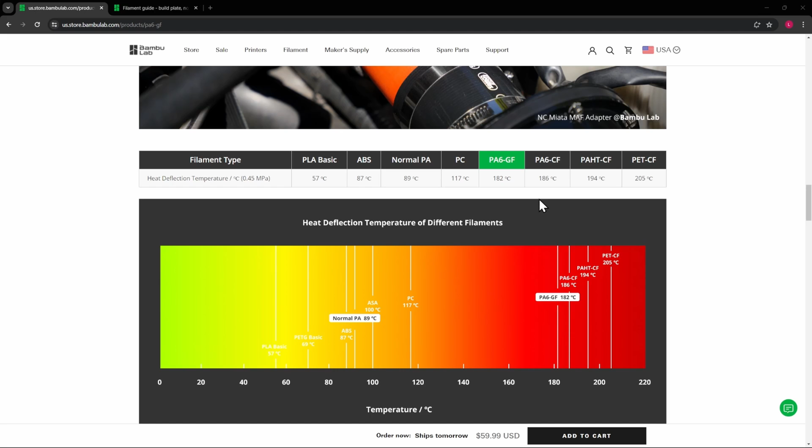So we'll see where it stacks up with the thermal properties, right? And it's not the best in the world like PETCF, but it is right there in the middle, better than PC, and right around in the same range as the PA6 carbon fiber that we've reviewed in the past. The funnel is probably one of the prints that you should make if you do get a roll of this, because of the chemical resistance.

And I mentioned that in the beginning. Out in your shop, if you need to add fluid to your car or something like that, there'd be different chemicals and everything like that. So it'd be important to have something that could withstand some chemicals. So, it offers excellent resistance to chemicals, oils, and many kinds of solvents, right? So if you're doing any of that type of stuff out in your garage, or you're messing with chemicals, it'd be good to print a funnel with that, and we'll do that today.

So what's really cool is they have lots of different colors and everything, right? So if there was a chemical spill or something, you can make a sign out of this stuff. It's really cool that they started to add the hex code to all of their colors. That's really, really cool. And again, here's how it stacks up with PA6 carbon fiber and PAHT carbon fiber, both of which we reviewed on here.

AMS compatibility, it does say yes on here. This used to say yes as well, but it doesn't anymore. Dry out before use. One of the other benefits of this is it is showing a higher print speed than the rest of these. So, it may print a little bit faster. It does require an enclosed printer. So that's where the AMS Lite, I'm not sure which enclosed printer you're going to do with that, unless you print out and make one of the enclosures for the A1 or the A1 Mini, which I don't have. So we won't be trying this out on the A1 Mini this time.

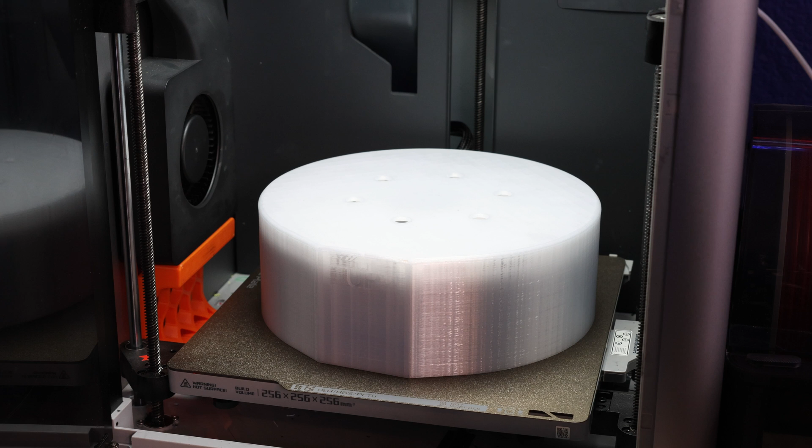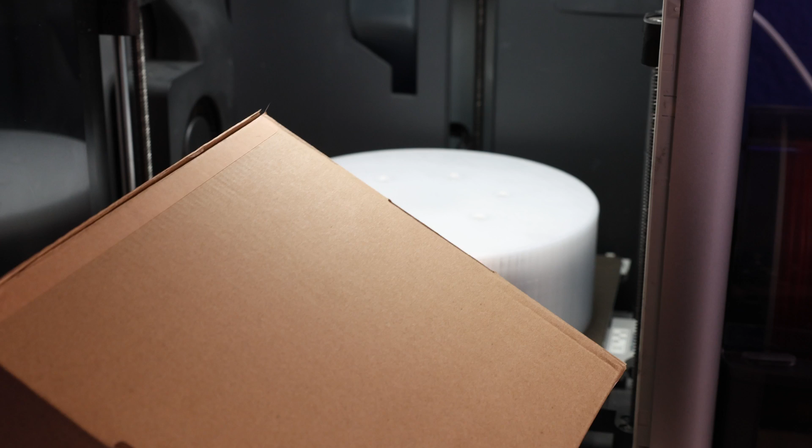So let's go ahead and get it out of the printer and load it into the AMS, and then we'll make our first print. All right, so here we are in the printer after it is dried. You'll see that I do have a spool cover for it that is needed for this. Otherwise, if you haven't printed one of these out, you can just use the bottom of the box. Just cut the lid off and put the bottom of the box over the spool to cover it.

This glass fiber filament might be a really good filament to print one of these covers out of as well. So if you do have a roll of this and are looking for something, one of these covers would be a good thing to print out of it, since it does have high thermal resistance. So let's go ahead and get it out of here and get it loaded into the AMS.

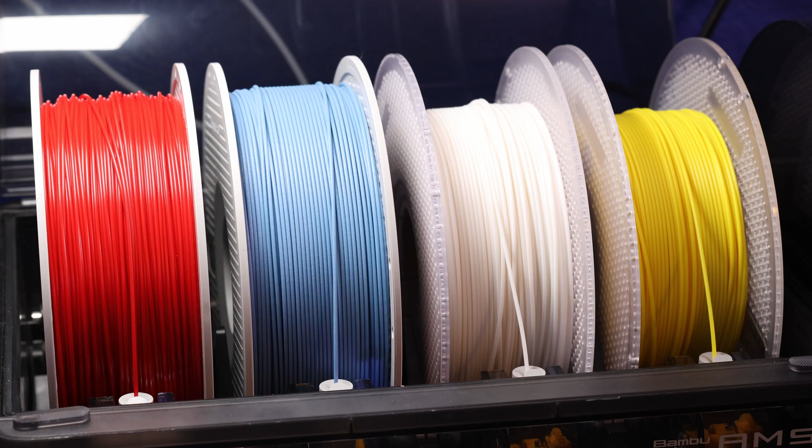All right, so here we are in Bambu Studio, and you'll see that when I did the resync on my filaments, it just put some generic filament in there and gave me a warning. I spent a little while looking into this, and it looks like Bambu is selling a filament that's supposed to work with their whole ecosystem that doesn't yet. The filament profile actually isn't loaded in the normal Bambu Studio as of recording this video. So the way I'm able to get it in there is by running the beta version of Bambu Studio. And you'll see I haven't even turned on advanced mode here.

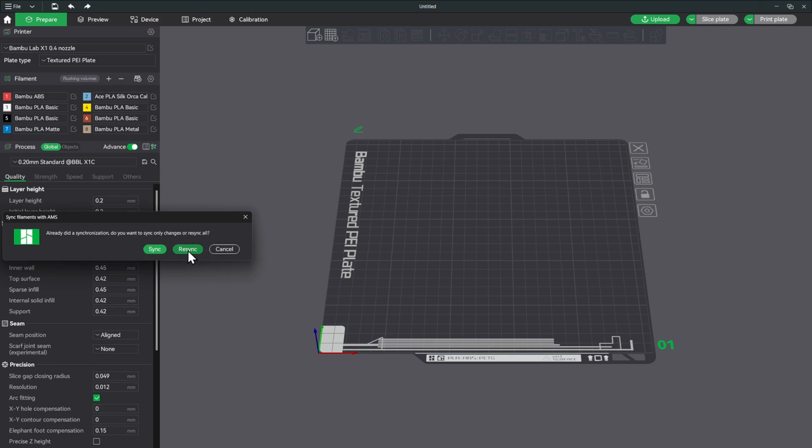That's as of recording this video, so I would imagine the next update of Bambu Studio will probably have these profiles. But you need to go in here and you'll see that there's a new filament that's been added, the PA6 glass fiber. So we'll hit that and hit confirm. And now when I resync my filaments, we'll see that the PA6 glass fiber is in there. What's really weird is the AMS recognized it, the machine recognized it and put it on the front, and even in here it has shown the glass fiber. It's just not been able to show up under this print profile.

So now that that's in there, this is the profile that's loaded. If you don't want to use the beta version, you can take a screenshot of this and load in the settings coming from the beta version. There's all of the nozzle temperatures, the max volumetric speed, the flow ratio, the density, and all of that.

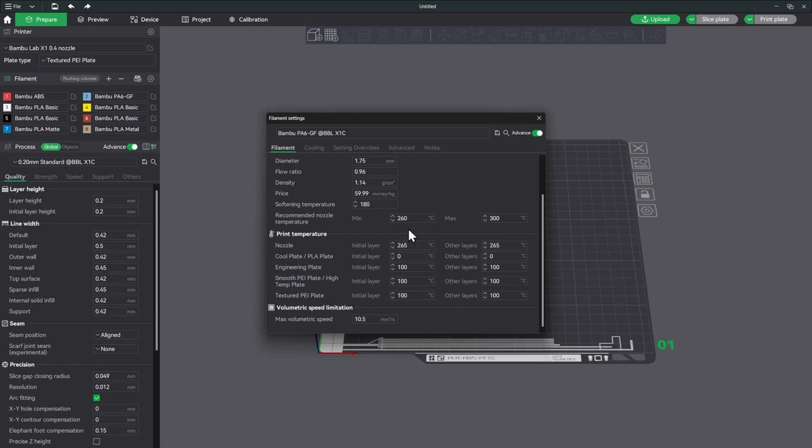Okay, so now let's get our Benchy loaded in here and get a print going. All right, we have the Benchy loaded and selected with the PA6 glass fiber. I am going to use the textured plate for this since it is a higher temperature print. I don't want to ruin one of my prismatic plates, so we'll do this on the textured plate because I know it'll work on there. Let's see how long it's going to take to print, and it looks like 1 hour and 17 minutes. So we'll go ahead and print this, and I'll see you when it gets done.

All right, so while the Benchy is printing, I'll show you where you go to do the public beta for Bambu Studio. So I'll leave a link to this. This is the releases, and this is the beta releases. So you just go here and you scroll down to the bottom, and you'll see all of the assets here.

And you'll see Linux, Fedora, Ubuntu, Mac, Windows, and Windows Public, version 1.58 or 1.09, whatever. The ending is 1.58. This is the one that I downloaded and used, and that allowed me to see the PA6 glass fiber. And that was as of late April 2024 when this video is recorded.

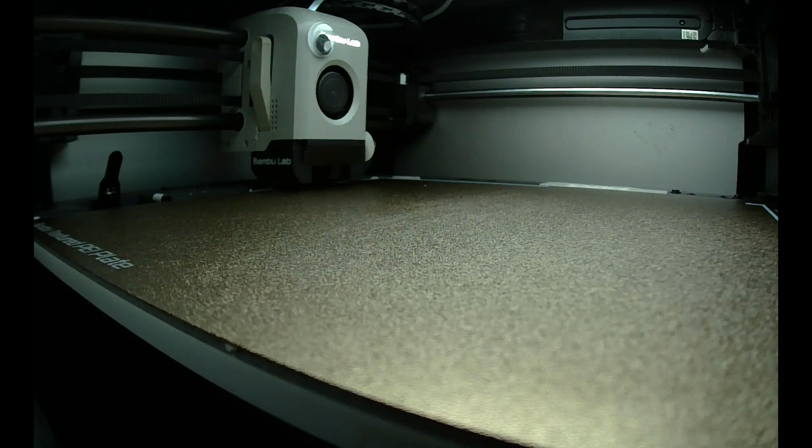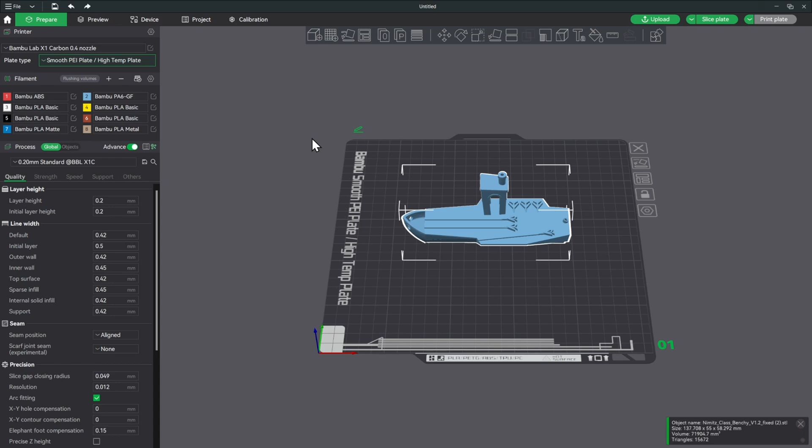All right, so as you saw, I tried that 3 different times and I had the same result each time: it failed, and it didn't stick to the PEI plate. So one of the other plates that it recommends is the smooth PEI plate, or the high temperature plate. So let's switch over to that and go ahead and hit slice plate. And remember to get rid of these printing tip things. You can just hit collapse there.

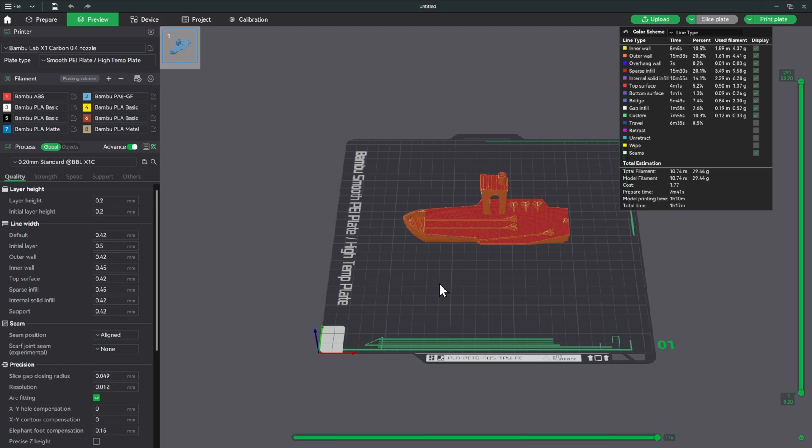Same hour and 17 minutes. So we'll go ahead and see if we can get it printed on here. I cleaned the high temp plate, or the smooth PEI plate, and I put a fresh coat of glue on there. No liquid glue as per the Filament wiki, only use the waxy glue. So we'll go ahead and get this printed, and I'll see you when it gets done.

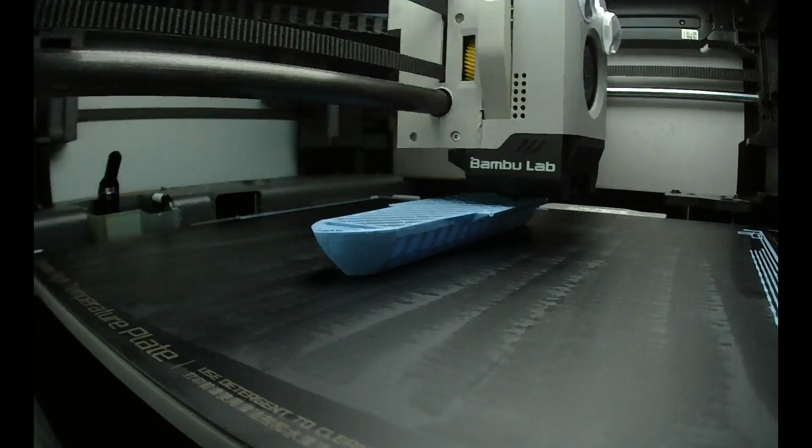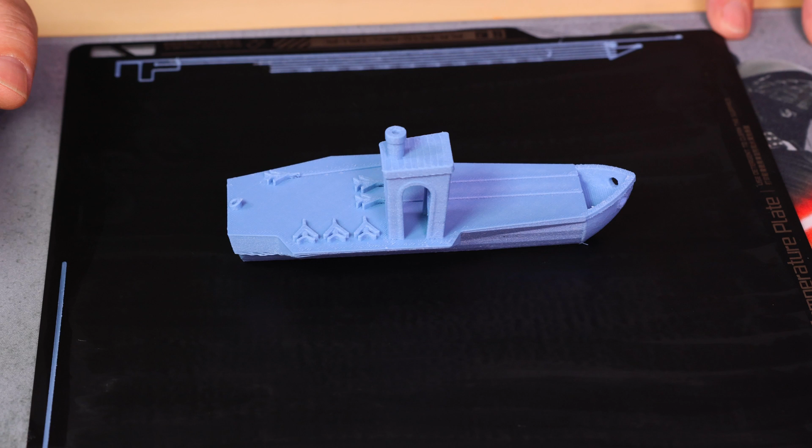All right, so let's take a look at it after it printed finally. I was not able to get it to print on the PEI texture plate, but I did get it to print on here. The first thing that I notice is not all of the top is smooth. Some of it is, but there are some pieces that aren't smooth. The other thing that I noticed is there is some layering and some imperfections on these overhangs here, and it is not the smoothest filament that I've ever used.

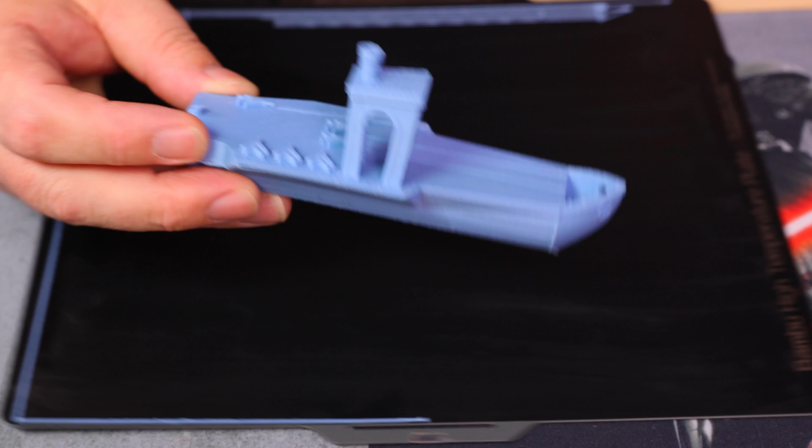Now I'm sure we could tune a little bit out of this. I'll leave a link to an article of some people that were tuning because there wasn't a profile loaded in Bambu, where they're using some higher temperatures on here to compensate for some of these flaws. So the first thing I would do is probably a temperature calibration on this, if this is something that you want to use a lot of. So I would do that.

That might get rid of some of this and help with some of the adhesion, and maybe help smooth some of it out. But otherwise, it looks really, really strong. Looks like it's really good filament for the niche purposes that you might want to use this in.

So with that being said, let's go ahead and get this plate ready again. And let's go find us a really nice funnel in Maker World, and we'll print out a funnel so we can have it out in our garage if we need to pour any chemicals and don't want to put it on the floor. So let me get everything set up, and I'll see you in Bambu Studio.

All right, here we are on Maker World, and I found these really cool fast funnels with an air outlet or whatever. So these are supposed to make things go down a little bit faster. Not sure if that's the case, not really the point of this video, but these look like some cool funnels that I can download here. So we'll see, there's all kinds of small, medium. There's even profiles for A1 mini and the X1 extra small funnels and everything.

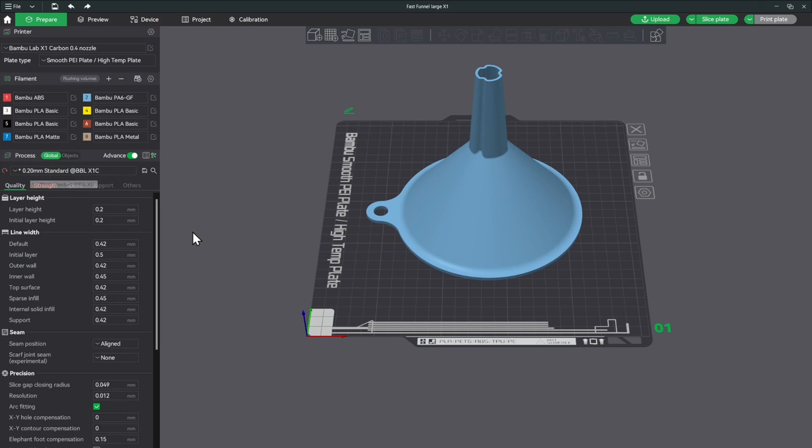So we'll leave this one the same as the maker put it in here. We won't change anything else. I've left all of this stuff the same, haven't changed any of these things within the 0.2 millimeter standard Bambu Lab X1C printing profile. So let's go ahead and slice it and see how long it's going to take to print. Around 2.5 hours, which is not bad at all. So let's go ahead and get it printing, and I'll see you when it gets done.

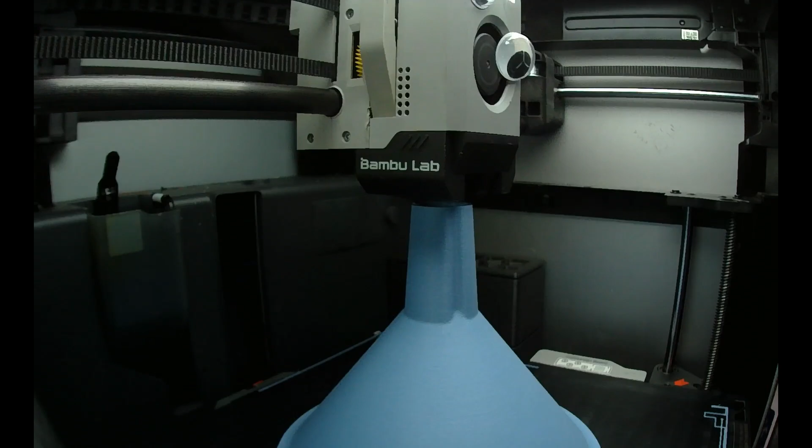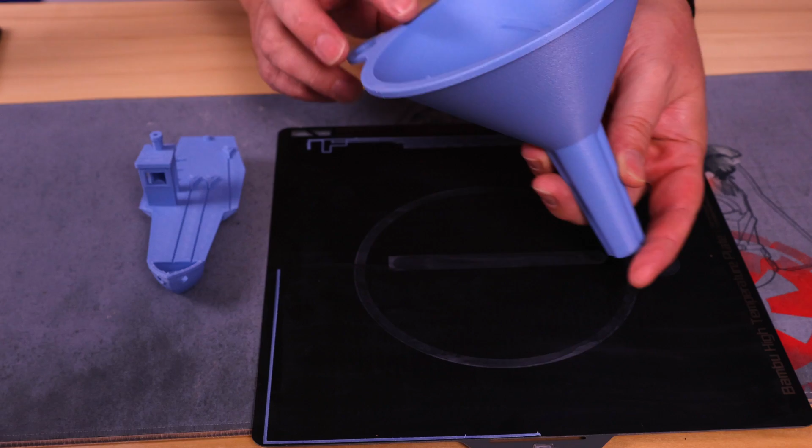All right, so let's take a look at the funnel once it's all printed out. And I will say the quality of this is really, really good. For the size of project this is very, very sturdy. There's no wiggle in this at all. And this is going directly into my garage because it looks that good.

Yeah, so I would recommend printing these even if you only have ABS or something like that. These funnels look pretty good, but this does look like a really good filament to do that. Looks like we have a little seam on each side there, but that's okay. Otherwise, it turned out really, really good.

So a couple of other things that you might use this type of filament for would be like mechanical arms or pieces like that, maybe for a robot or something. CNC machine parts, linear rail guides, and different things like that. We saw automotive components in the one example on the website, but dashboard trim might be another thing that you might want to use this for. Things that go outdoors, tool holders and organizers, structural components.

And then again, as we learned with the eSun glass filament fiber, these are really good for resisting chemicals and everything like that. So if you have a use case where you're going to have chemicals or high impact or need high heat resistance or things like that, this is going to be the filament that you use for that.

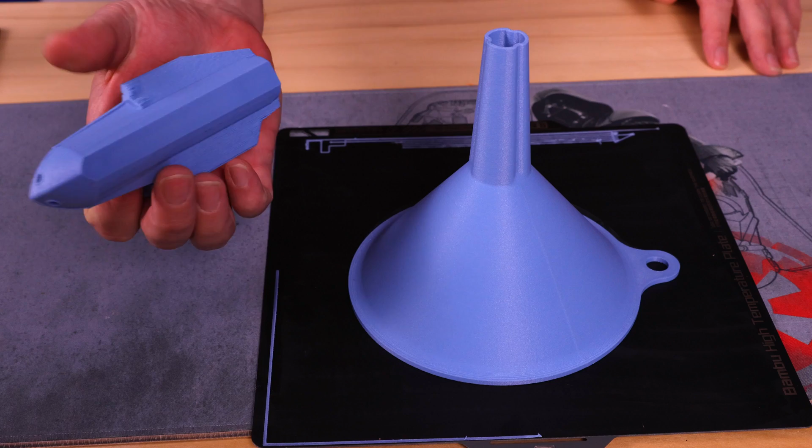Now for an overall review of it, most of the Bambu filament has been plug and play for the most part, right? So you can calibrate all the filaments and do all of that, but it's not absolutely necessary. You can get functional prints without doing anything with some minor defects or whatever. Same with this, right? We haven't calibrated it or anything, but we have some minor defects where the seam is on it.

But for the most part, the filaments that I've got from Bambu Lab have been plug and play, right? And that's kind of the benefit of the RFID and all of that. So I was a little bit surprised that the AMS recognized it and was able to send the RFID signal to the printer, and the printer recognized that it was glass fiber. And it showed that in the device on Bambu Studio, but on the filament profile that wasn't in there. So that was a little bit weird, especially since this has been out for a couple of weeks.

So I did have to download the beta version of it, which is the first time I've ever had to do that for one of their filaments. So that was a little bit interesting. So it's worth calling out, at least at the time of recording this video. You had to go through a couple of extra steps just to get the print profile. And that was the only kind of negative that I have on it. Otherwise, it printed really well right out of the box.

It would require, I think, a little bit of tuning, and a little bit of the heat. You probably need to run it a little bit hotter. And the other interesting thing is that it says it's not compatible with the A1 or the AMS Lite. And yeah, this prints at pretty high temperatures. You saw the little eyeball melt off, and it's still hanging on by a thread. But that's one thing to note, that it needs pretty high heat to print with, enough so that it was melting the little eye off of it.